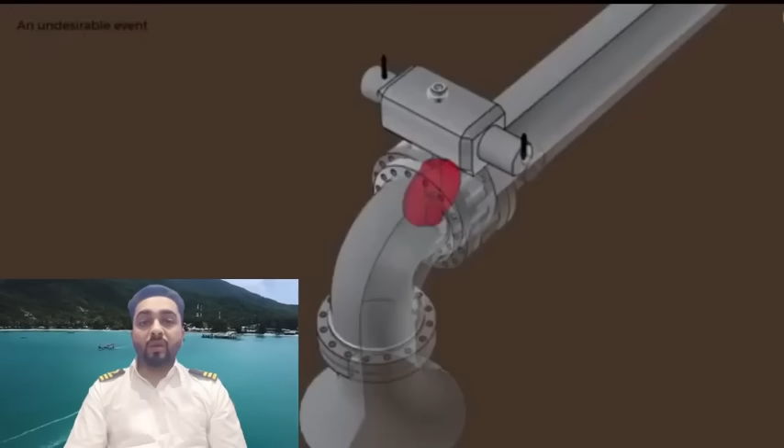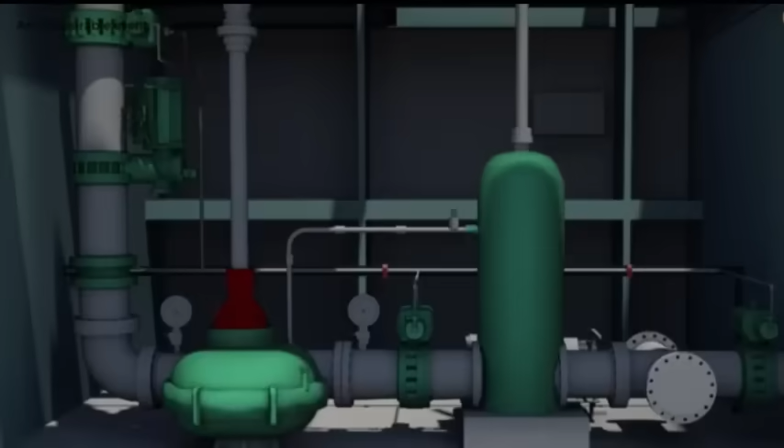In May 2016, a crude oil tanker arrived at the port d'Antifer to discharge 1.9 million barrels of Bonny crude oil. After being given the go-ahead to start the discharge operation, the cargo officer flooded all 3 cargo pumps by opening the number 1 center cargo tank main suction valve, which was opened fully as required by the discharge plan. The number 1 center cargo tank was 98% full, and a full bore of crude oil suddenly impacted the walls of the pump casing, having traveled 250 meters along a 750 millimeter diameter pipeline.

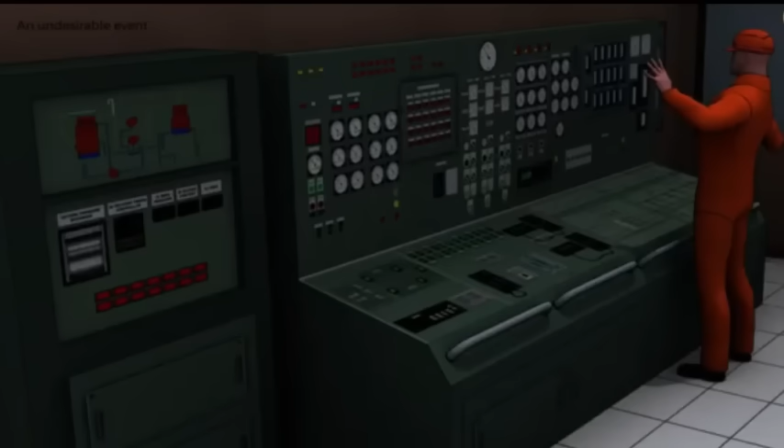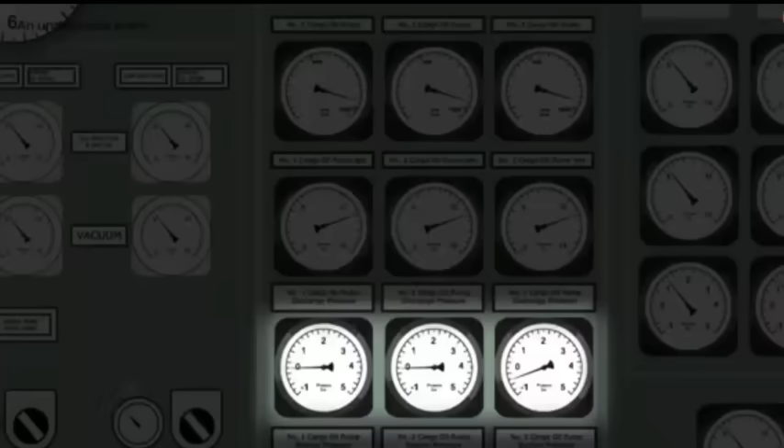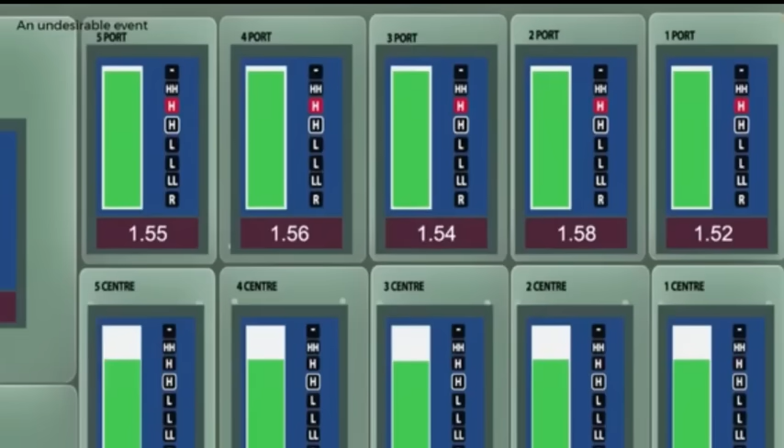This violently jolted the pump assembly and the fittings connected to it. The officer in charge heard a slight shudder, but as this happened every time he flooded the pumps, he thought nothing more of it. He didn't know that the pump suction pressure transmitters were always failing on number 1 and number 2 cargo pumps because they were being flooded this way. More worryingly, the impact had dislodged and weakened a suction pressure gauge pipe on the pump. As the officer in charge knew nothing about this, the rest of the cargo tanks were opened to the pumps and discharge continued with the pumps at full speed.

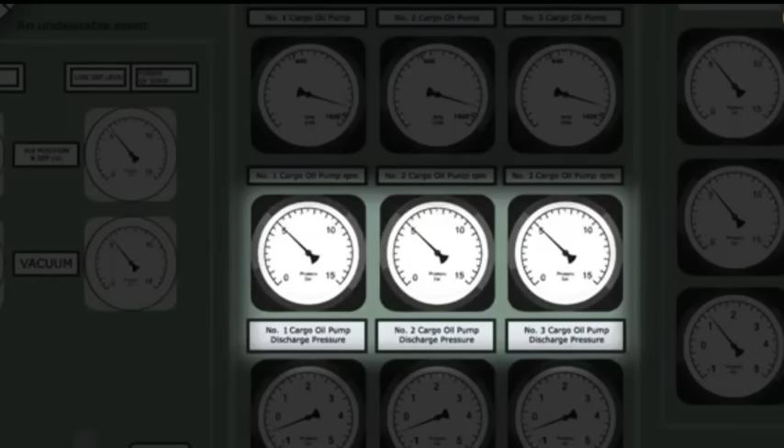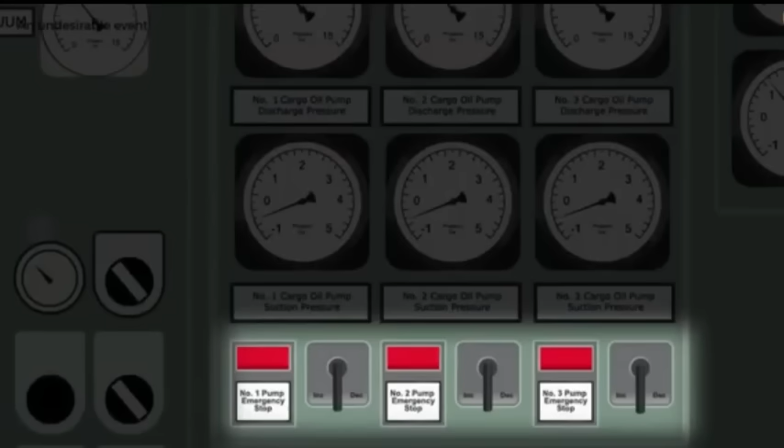When the tanks were close to empty, the pump suddenly became very noisy and the pump discharge pressure gauge readings fell. This indicated it was time to stop number 2 pump as per the plan and slow down the other pumps as the tanks were nearly empty. Unfortunately, cavitation subjected the already weakened pressure gauge pipe to sudden vibration. This was enough to make it shear and spray crude under high pressure all over the port side of the pump room.

Throughout this module, we will learn how these types of accidents can happen. More importantly, we will learn how they can be avoided during bulk discharge operations.

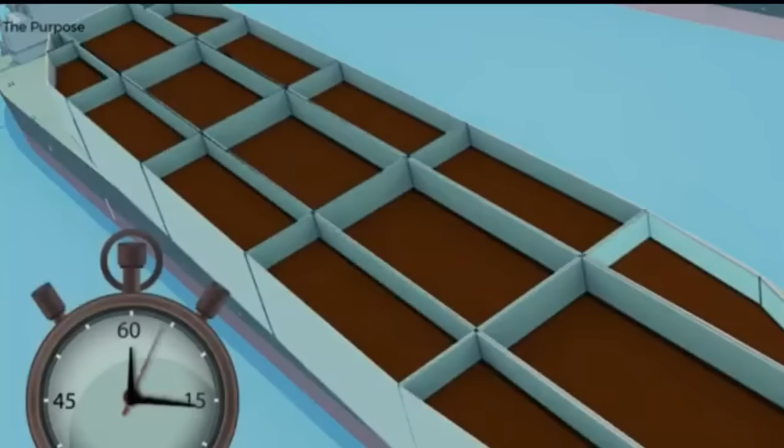Centrifugal cargo pumps are an essential component of the cargo system. However, without knowing how they generate flow and pressure, it's difficult for those controlling discharge to appreciate how to use cargo pumps effectively. Some tankers are able to discharge at a rate of 18,000 cubic meters per hour. This is the equivalent of filling 6 standard 20-foot shipping containers in 1 minute, that's 1 every 10 seconds. When considering such high flow rates, it's important that those in charge of a discharging operation understand how to control the centrifugal pumps.

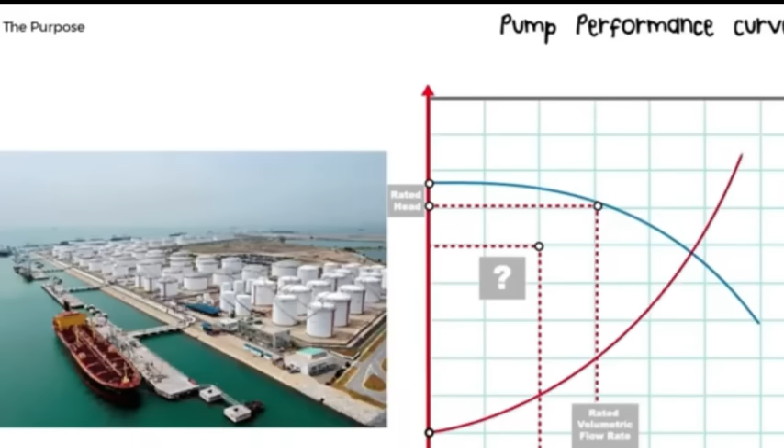We will start by looking at the relationship between discharge pressure and flow for different pump rotational speeds, and then consider how a cargo reception facility arrangement affects pumping rates. We will also focus on how to operate the centrifugal cargo pumps effectively and how to operate pumps as the cargo approaches the stripping levels.

Throughout, we will use this pump control console to show what you need to monitor and control during the discharge operation. We will also consider some of the practical aspects of controlling the fluid so that you can play your part in a safer and more efficient discharge operation.

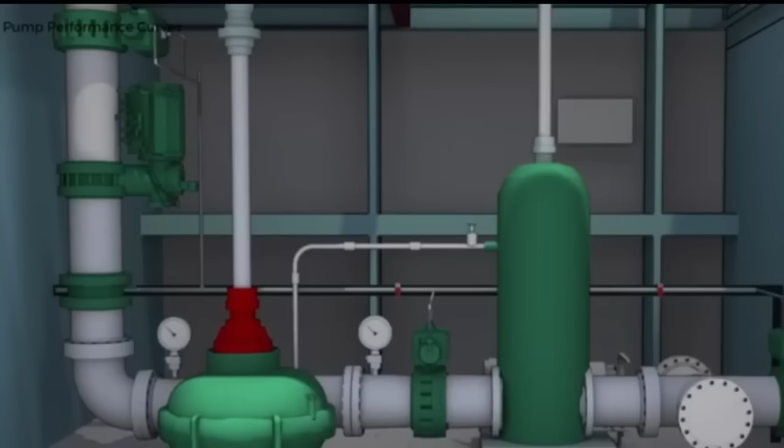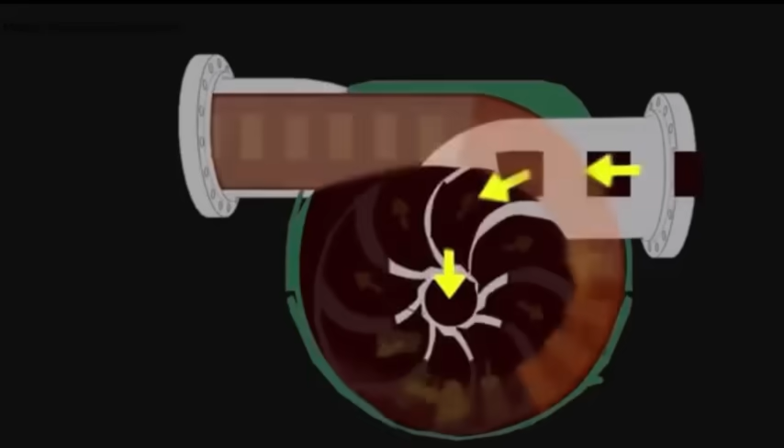Centrifugal pumps are used on crude oil tankers for the transfer of ballast and cargo, as they can develop large flow rates. Let's take a look at how centrifugal cargo pumps work. As crude enters the pump, the rotating impeller speeds up the liquid. The crude then slows down as it passes through the narrow part of a spiral funnel-shaped chamber called a volute. As the area of the volute increases, so does the pressure of the crude, which results in the crude leaving the pump with increased pressure.

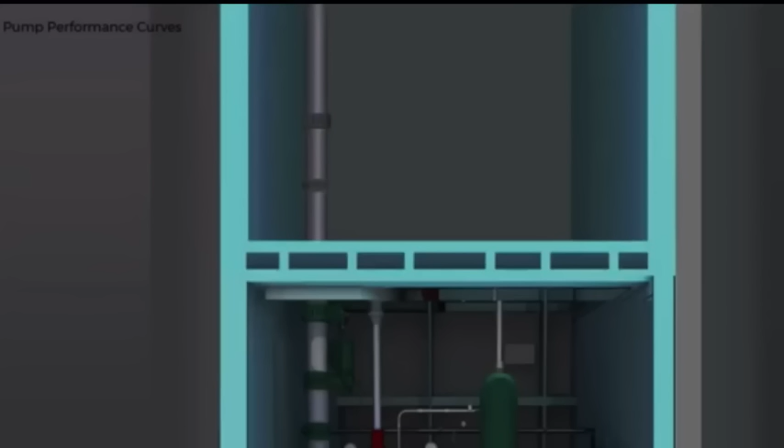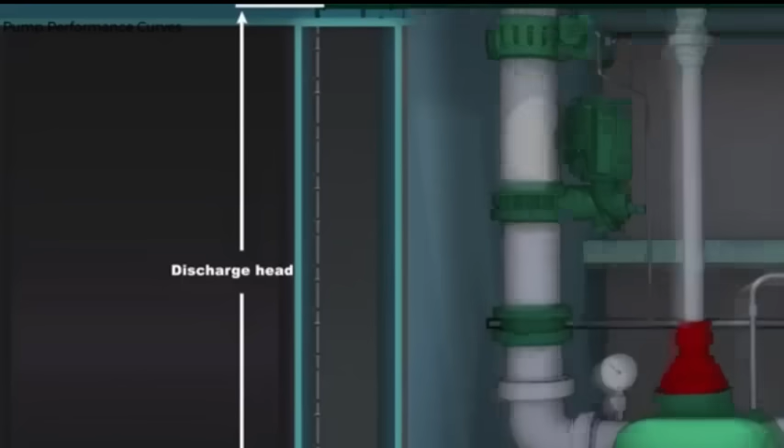If you were to control the flow of crude oil cargo correctly during a bulk discharge, it's important that you understand the relationship between the flow and the pressure generated by a centrifugal pump. When considering the pressure generated by a centrifugal pump, it's useful to think about how far a pump can lift a liquid. Pumping system designers and manufacturers refer to this as head, or more accurately discharge head. This is usually measured in meters but can be converted to more familiar units of pressure known as bar.

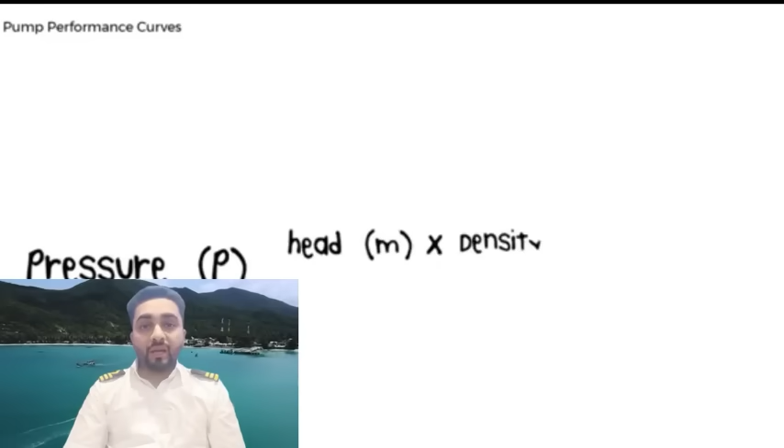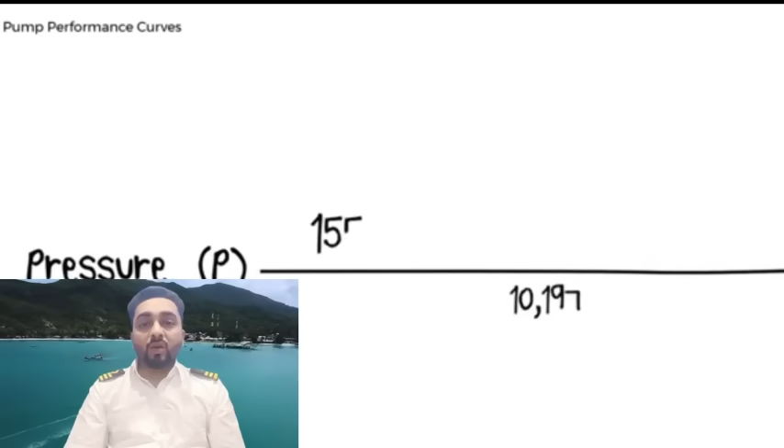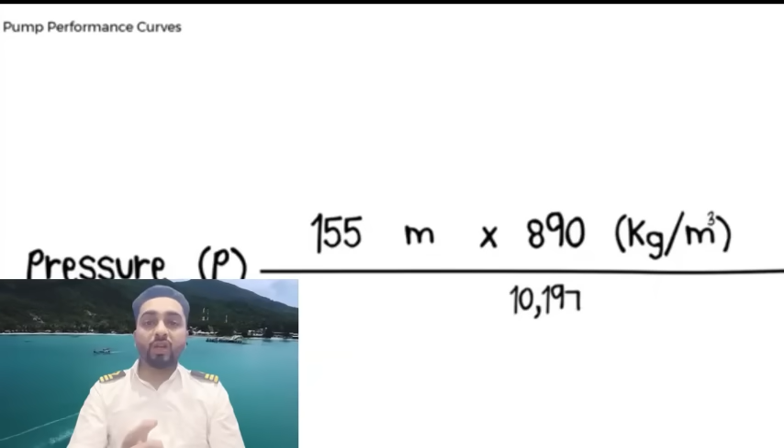So we do this by multiplying the head by the density of liquid being pumped and dividing it by 10197. For example, a head of 155 meters and a density of 890 kilograms per cubic meter would be equivalent to a pressure of 13.5 bars.

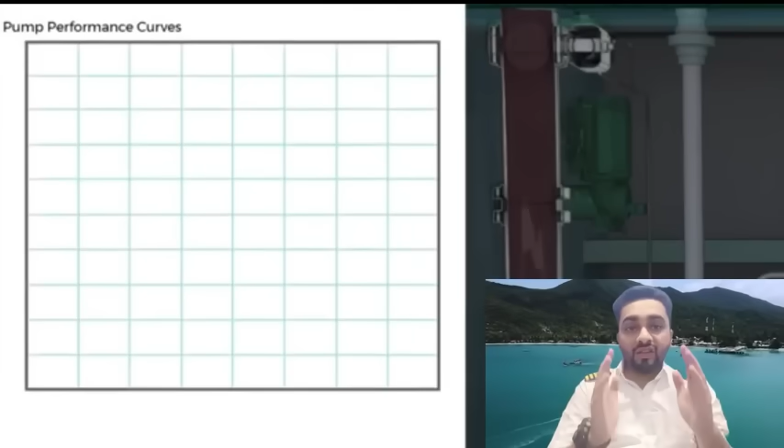Now, how the head changes with flow is the characteristic of the centrifugal pump, and this relationship can be shown on a graph, where the x-axis represents the volumetric flow rate in meters cubic per hour. We give this the letter Q, and the y-axis represents the head in meters.

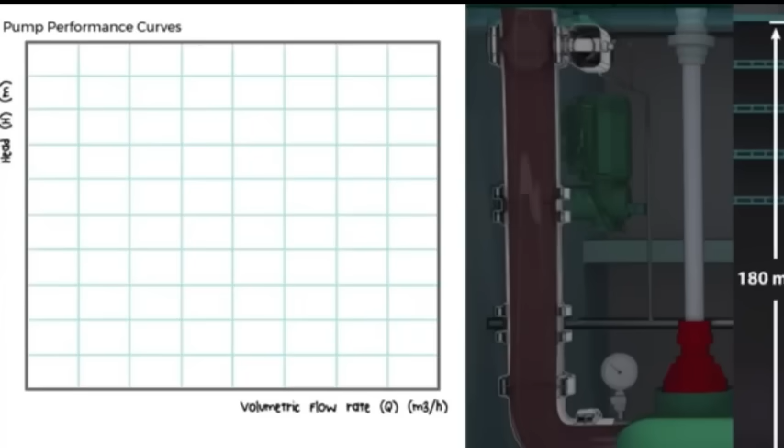We give this the letter H. The maximum head that a pump can generate occurs when the flow is zero. We call this the shut-off head, and it is equivalent to what would be seen on the pump discharge pressure gauge if the valve was closed against the flow. The maximum flow occurs when head is at minimum.

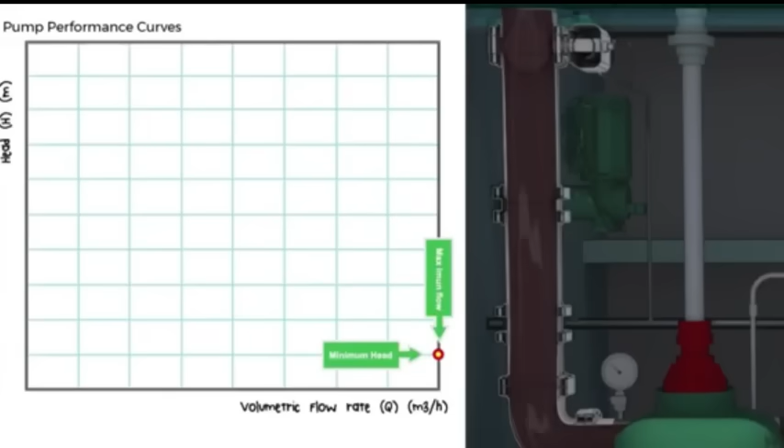This would be the case if the pump flow was totally unrestricted. Between these two points, there are a range of head conditions with corresponding flow rates. Pump manufacturers create the range of head conditions by throttling the pump discharge valve under test conditions and recording the various flow rates.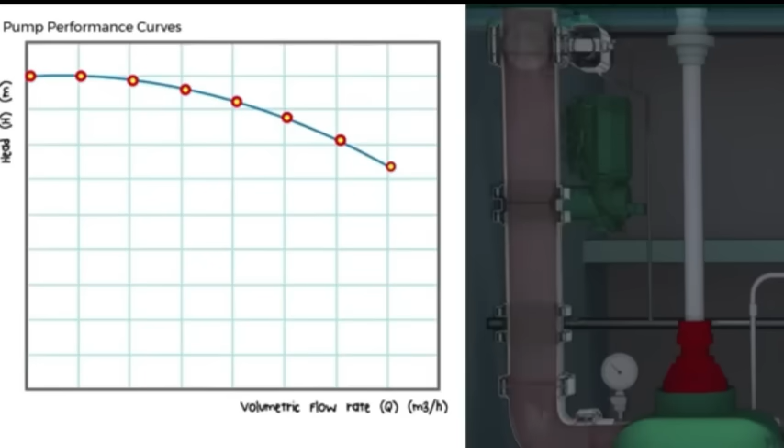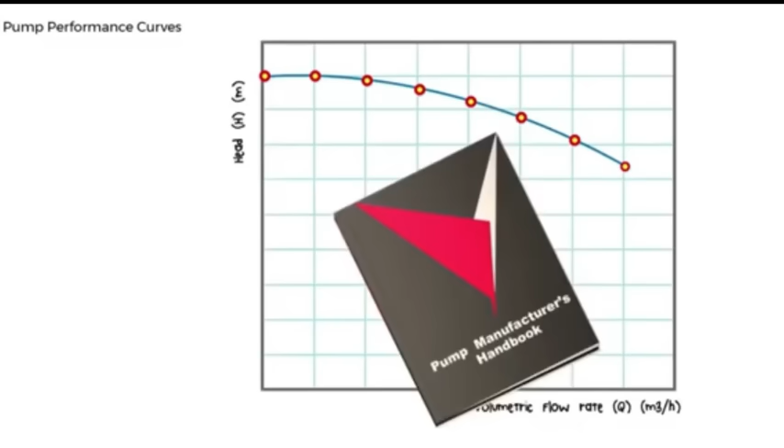The results plotted on the graph is known as a pump performance curve, or sometimes an HQ curve. You will see this in the pump manufacturer handbook, and they will often be posted in the cargo control room.

While it is theoretically possible to operate the cargo pump under the full range of head conditions, you should avoid operating the centrifugal pump close to the shutoff point because the flow rate is very restricted and the pump casing could overheat.

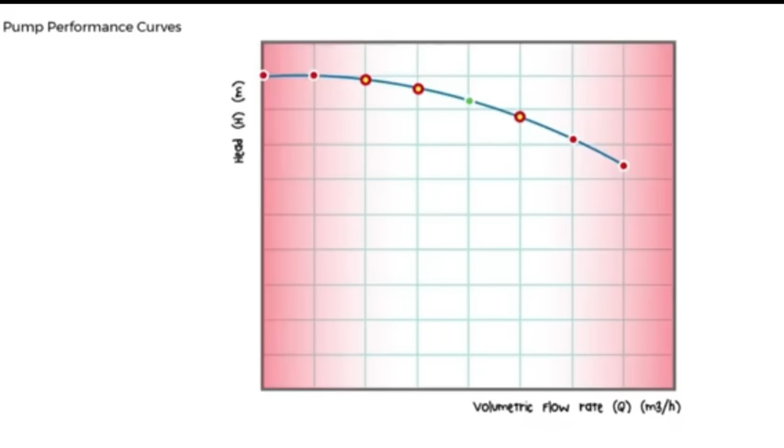You should also avoid operating under very low head condition, as the huge flow rate generated can cause a large torque on the pump shaft.

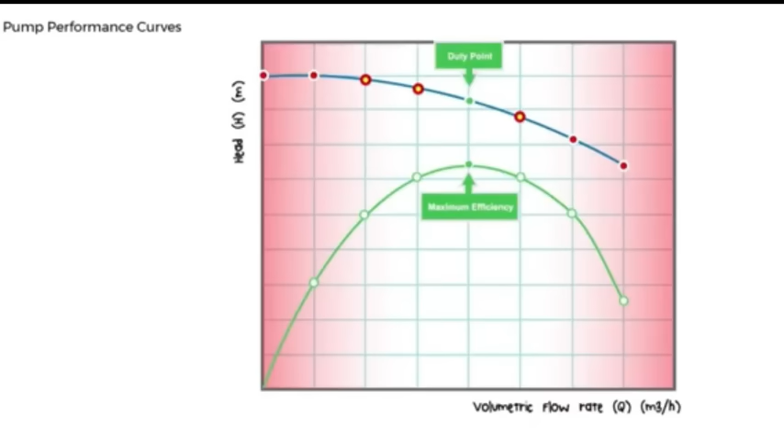There will be a point where the pump is developing flow and head at maximum efficiency. This is called the duty point, and this is the point at which design discharge head and flow rate meet on the pump performance curve.

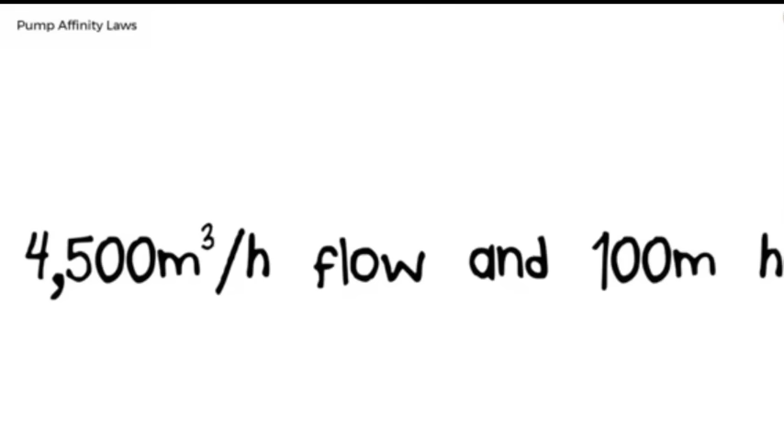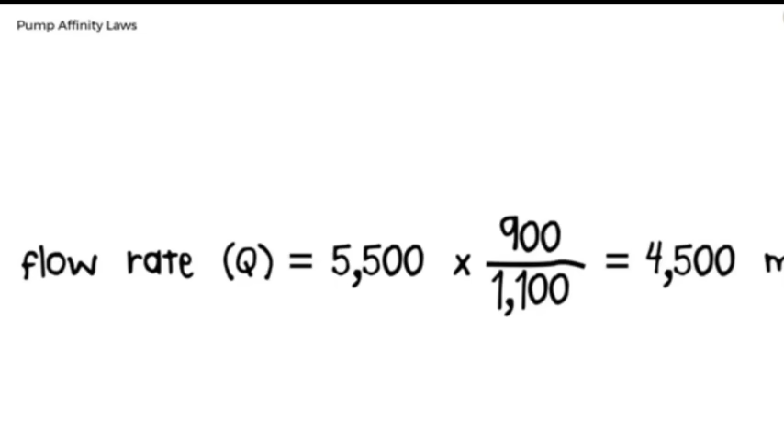4500 meters cubic per hour flow rate and 100 meters head. Using our formula from earlier, we can work out the flow rate by multiplying the design flow rate by the given pump rotational speed divided by design rotational speed. This gives us a flow rate of 4500 cubic meters per hour.

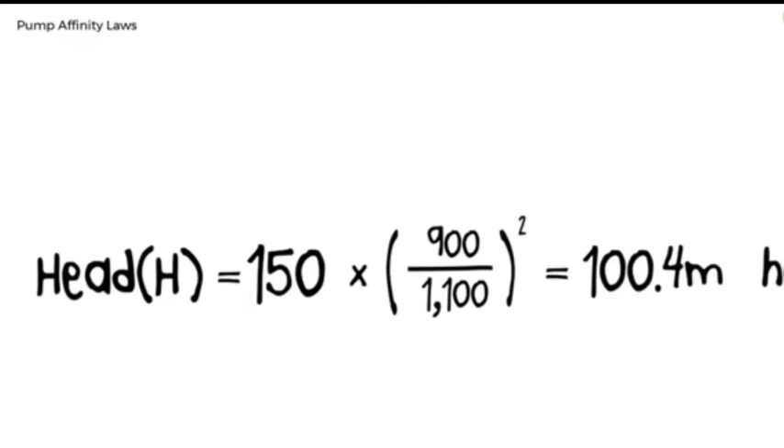Similarly, we can work out the head by multiplying the design head by the pump rotational speed divided by design rotational speed, all squared. This gives us a head of 100.4 meters.

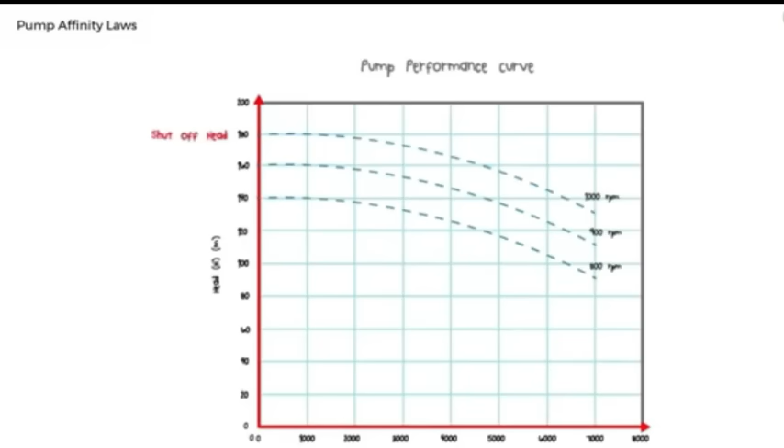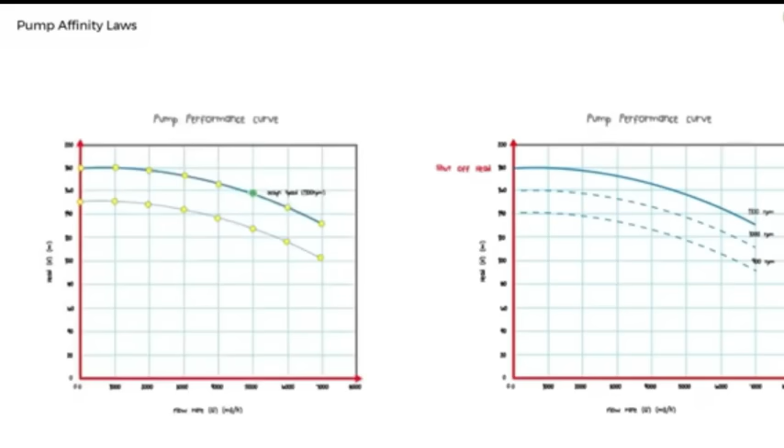In fact, we can calculate the head and corresponding flow rate for all points on our performance curve and plot this for a range of pump speeds. The resulting performance curves will be mathematically similar to the design performance curve, or HQ curve, for design speed that we saw earlier in the module.

In this case, our pump starts and gradually increases to its minimum speed of 640 rpm. As it does, the system resistance curve crosses the pump performance curve at 2000 cubic meters per hour and a head of 68 meters, or 6.7 bar.

As we increase the pump speed to 850 rpm, we achieve a flow rate of 2975 meters cubic per hour and a head of 116 meters, or 11.4 bar discharge pressure.

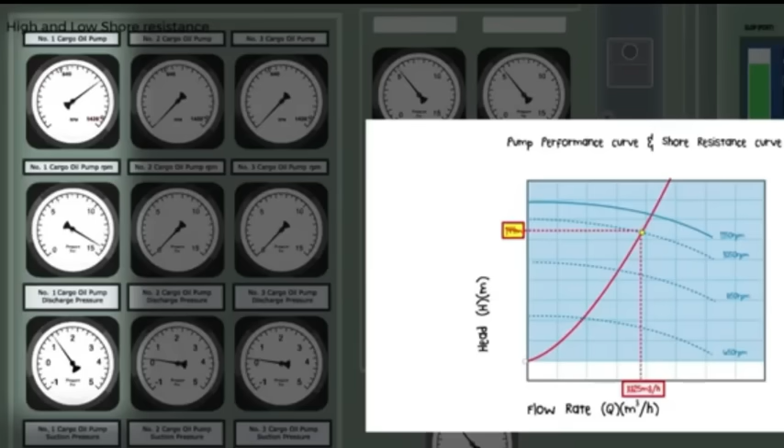As we reach 1050 rpm, we achieve a flow rate of 3325 cubic meters per hour and a head of 144 meters, or 14.1 bar discharge pressure.

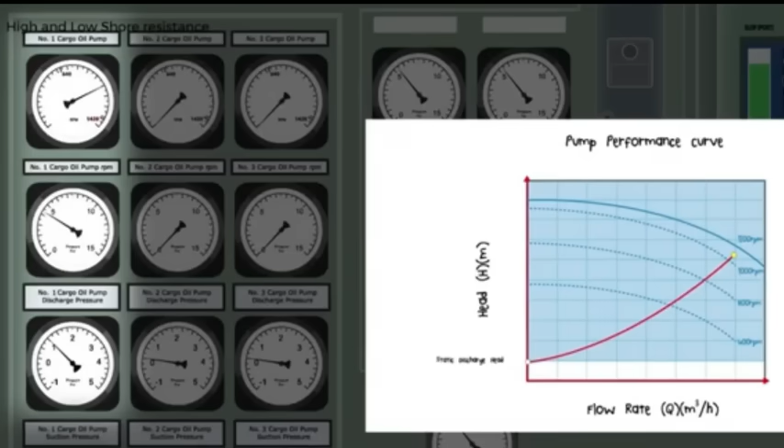The final thing to consider is what happens when we operate cargo pumps under low system resistance conditions. This can result in flow rates well in excess of the maximum permissible. Low system resistance conditions exist when pumping to combination storage or to shore tanks connected by a large diameter pipeline close to the tanker. This can lead to very high torque on the pump shaft.

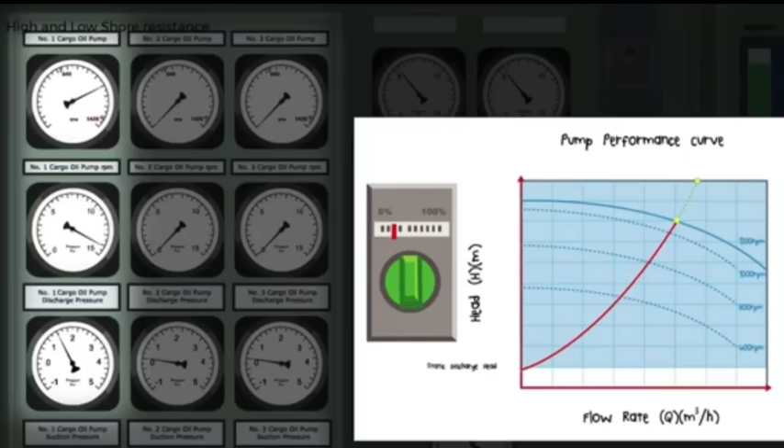In these types of situations, it is good practice to use the pump discharge valve to restrict the flow and create an artificially high head that is somewhere close to design conditions, or the duty point, on the HQ curve.

When a cargo pump is being run up, the person in charge must recognize when there are problems and what to do about them. If after starting, the cargo pump is noisy and the suction pressure suddenly falls to zero or goes negative, and the level in the cargo tank being discharged is not changing, it is most likely that an inline valve is closed on the pipeline on the suction side of the pump.

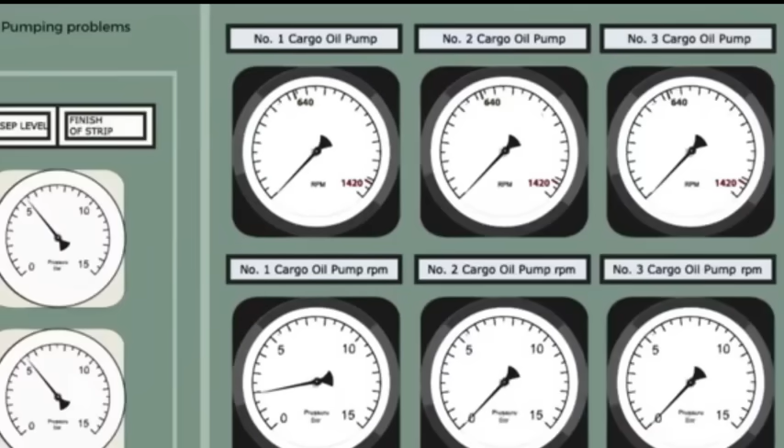Similarly, if pump suction pressure doesn't fall when the pump is started and the discharge pressure rises quickly, and there is no change noted for the tanks being discharged, an inline valve is closed on the discharge side of the pump. This could be on the ship or terminal side.

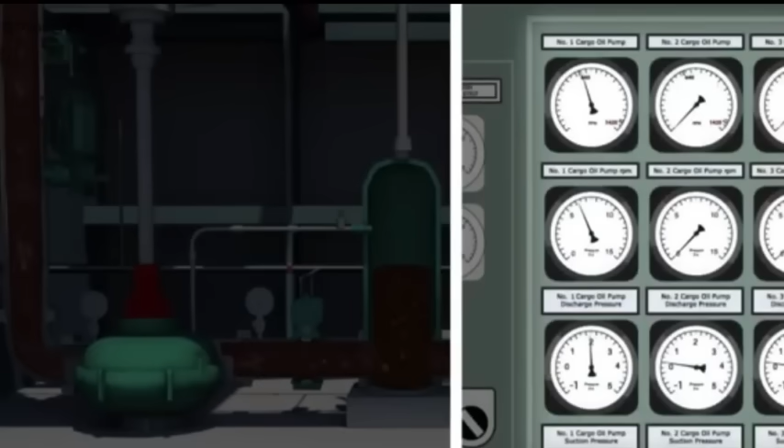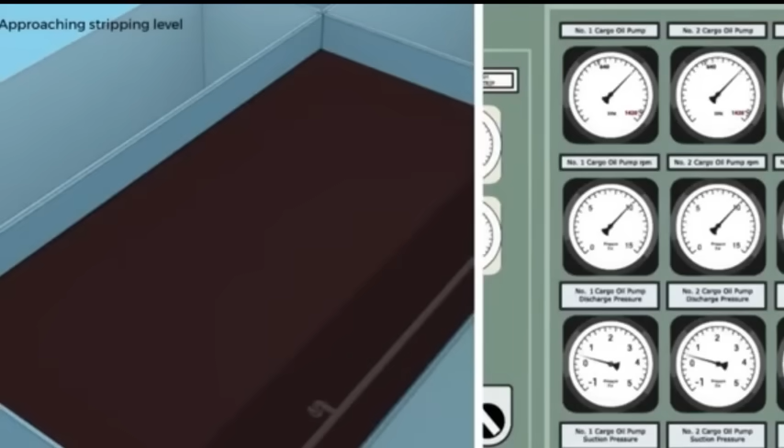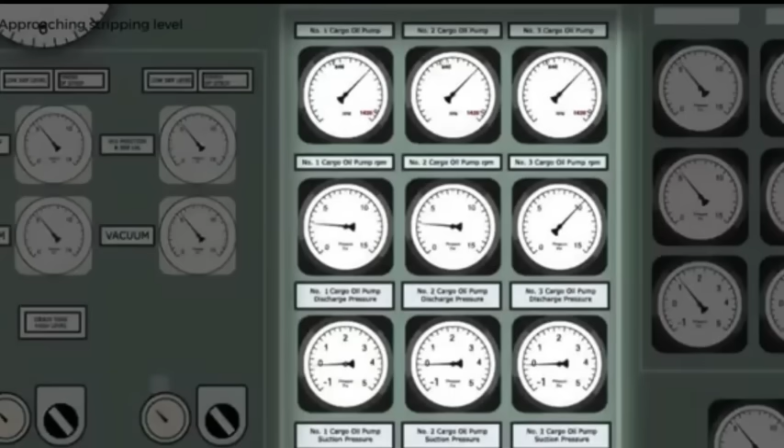If a pumping problem cannot be dealt with straight away, then the pump should be stopped immediately. As the bulk pumping continues, the pump suction pressure will decrease due to the falling tank levels, as seen by the increasing ullage. In fact, the pump suction pressure will decrease until it is negative.

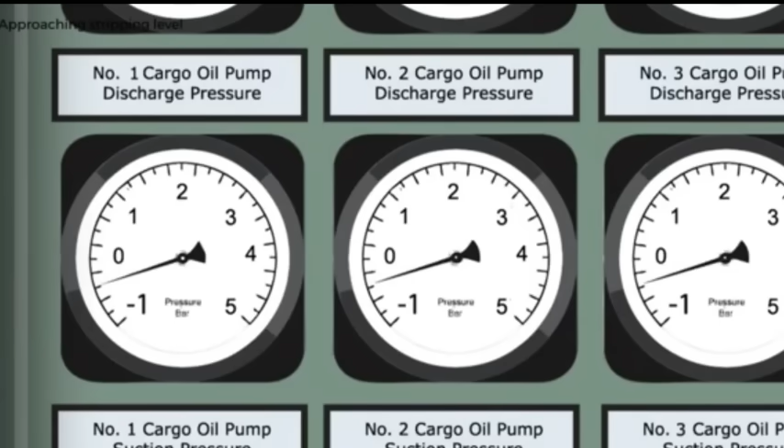When the tank level is near to stripping level and the pump suction pressure gets too low, pump cavitation can occur. This is caused by the formation and subsequent collapse of vapor bubbles in a pump, which can damage the pump impeller and other pump components.

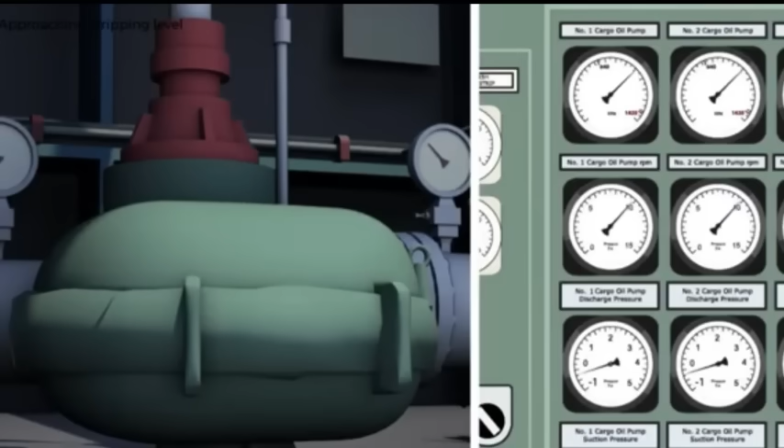This must be avoided by gradually reducing the pump's rotational speed as the cargo approaches stripping level, and eventually stopping one or two of the cargo pumps if three are running.

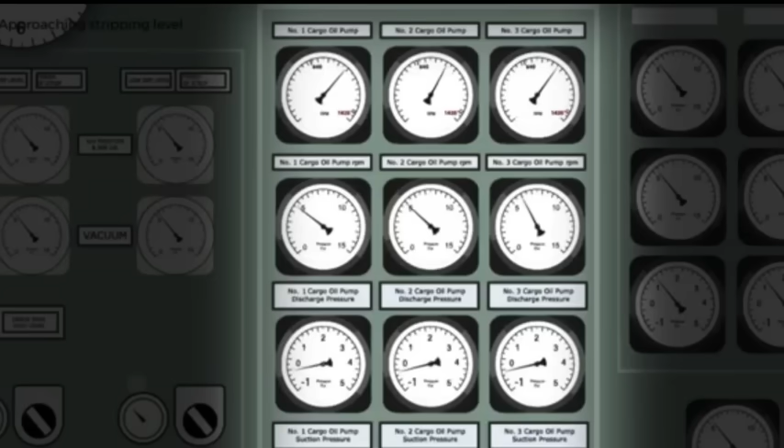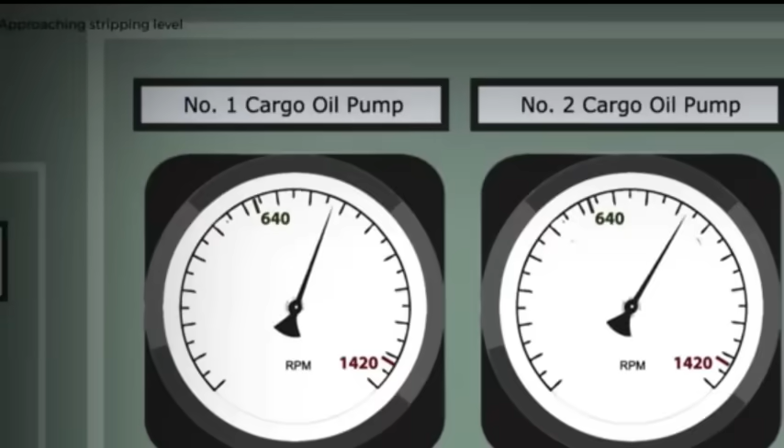If you see slight movements of the pump's tachometer gauge needle or the suction or discharge pressure gauge needles, these may be the first indication of the start of pump cavitation. The pump speed should then be reduced as much as necessary until steady pumping conditions are resumed.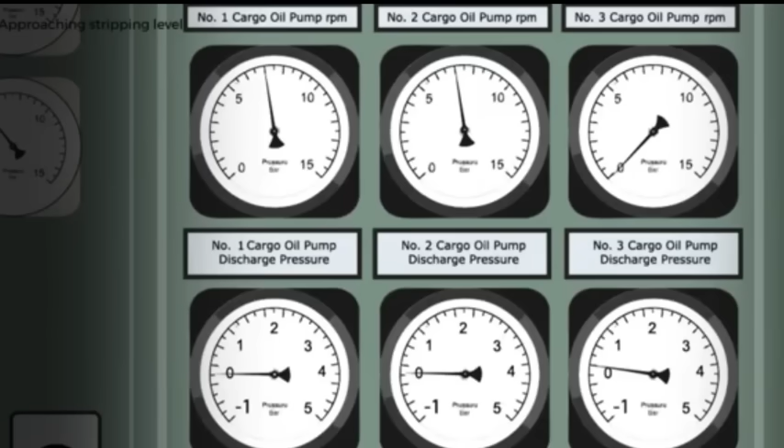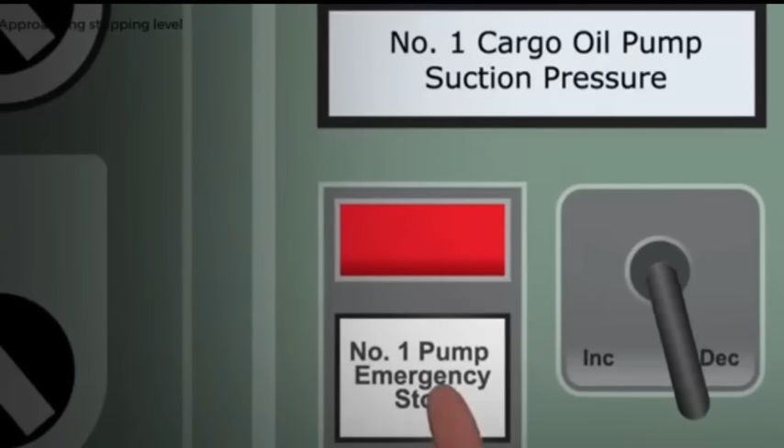The pump suction pressure gauges must be monitored extremely closely at this stage, and the pump revolutions must be reduced until the cargo tanks reach stripping levels. At this time, the main cargo pump should be stopped or operated with a vacuum stripping system.

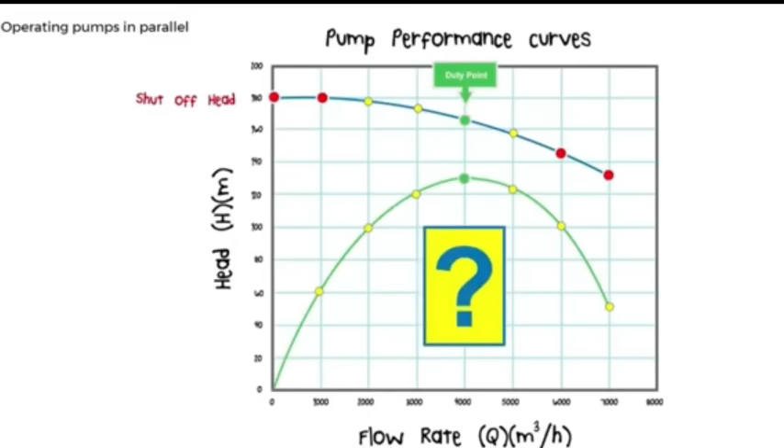Earlier we considered how a single centrifugal pump develops flow and head under high and low shore resistance conditions. But what happens when we operate two or three pumps at the same time?

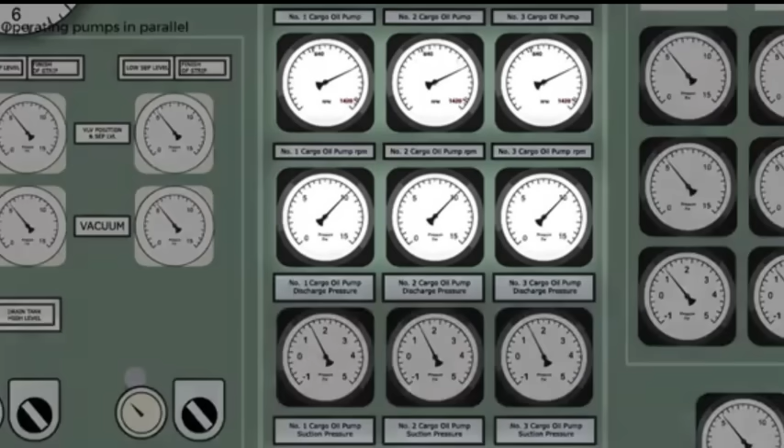When two or more identical cargo pumps discharge into a common pipeline to a shore reception facility, we say they are operating in parallel. When this is the case, each of the pump's rotational speeds and discharge pressures should be the same or very similar to ensure they all do a similar amount of work.

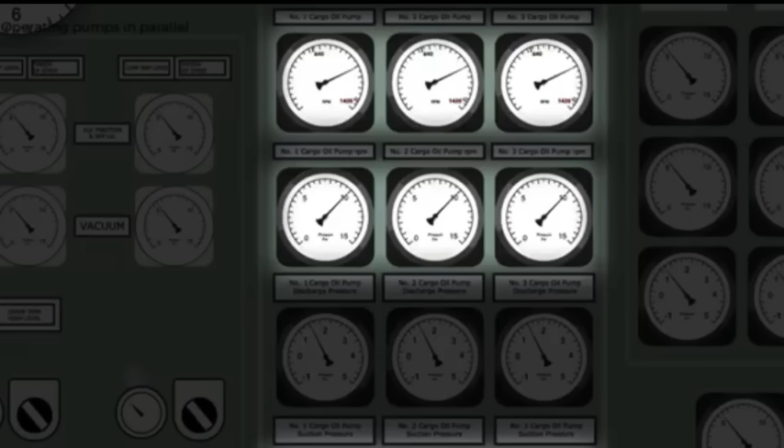When the discharge pressures are different, the multiple cargo pumps are not operating together effectively, and the casing of the pump with the lowest discharge pressure will overheat because it is not pumping effectively and is contributing little, if anything, to the flow rate. Let's look at how multiple pumps operate in parallel by considering performance curves and shore resistance curves.

When operating identical centrifugal pumps in parallel, they will achieve the same shutoff head as they would for one pump at a particular rotational speed.

When we look at multiple pump performance curves, we see that the flow rate of two pumps operating in parallel, without considering shore resistance, will be twice that for one, and the flow rate for three pumps will be three times that for one.

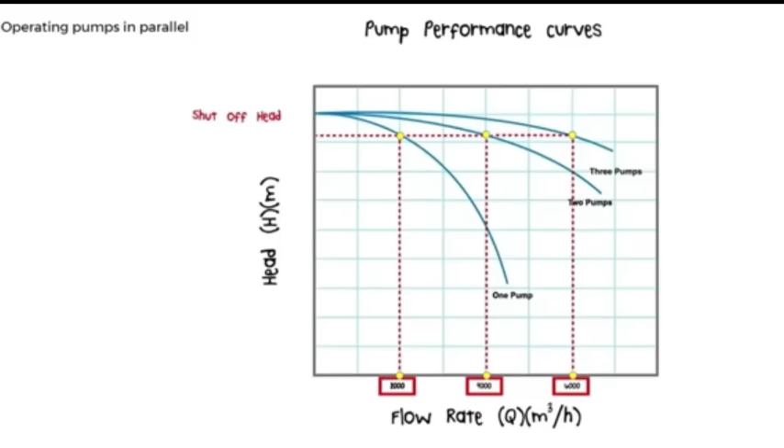However, if we overlay this with a typical shore resistance curve in the same way as we did earlier, we see that the actual flow rate for two pumps will not be twice that for one pump, or three times for three pumps.

When there are high shore resistance conditions operating, two pumps only increase the overall flow rate slightly more than if one cargo pump is running, but the discharge pressure increases significantly. When operating three pumps, the increase in flow is hardly noticeable, but again the discharge pressure increases significantly.

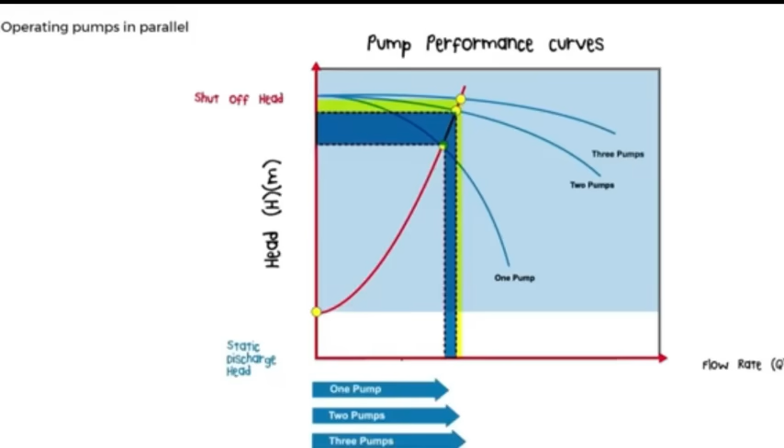Under these high shore resistance conditions, paralleling three cargo pumps requires careful control to match the pump discharge pressure. When operating in parallel, the rotational speed of each pump should be increased in steps of 50 or 100 rpm.

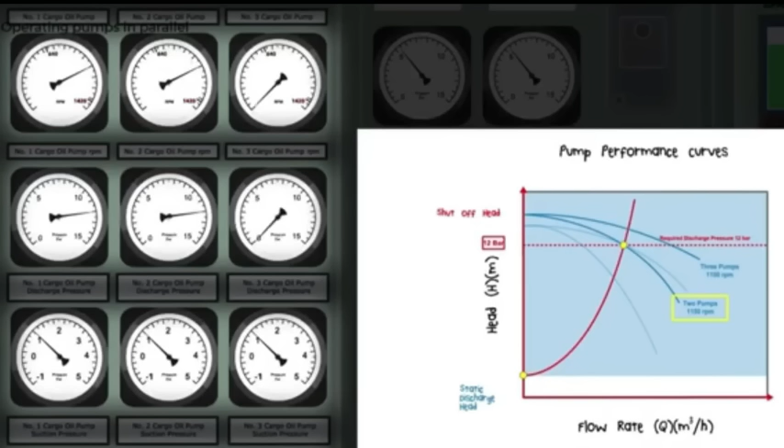Between each step, the discharge pressure should be seen to settle before increasing any further. When possible, it is always more efficient to operate two pumps at or near full operational speed rather than using three pumps. This was part 2 of the cargo oil tanker discharge operation.

Okay, so I tried my best to give you more and more information. That brings us to the end of today's video on oil tanker discharge operation, pump characteristics, HQ curves, and the precautions every duty officer must take. I hope this breakdown helps you to build your confidence in handling the cargo operation safely and efficiently.